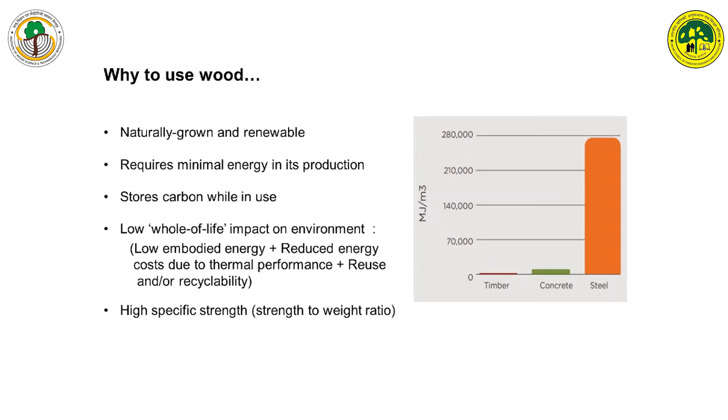Then if wood is good in properties as compared to metals, can we use any wood for every application? No, because to qualify to be used as a structural material, or even for non-structural applications with low load bearing, we need certain mechanical properties, which Dr. Shukla has mentioned already. These are the mechanical properties we measure in the wood, and based on the mechanical properties we suggest the end applications.

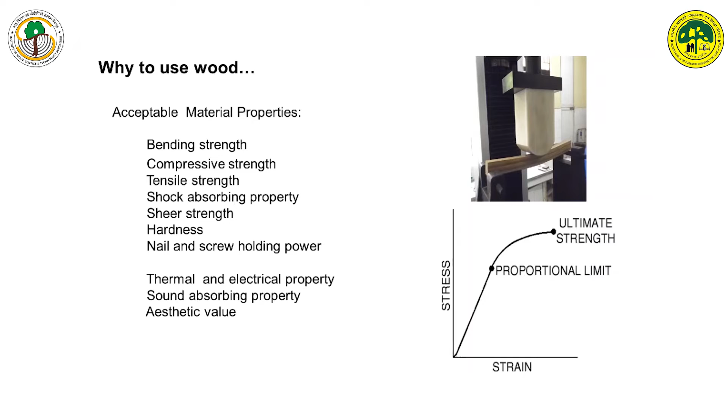However, there is huge variability in wood, and in spite of that variability, it is possible to derive acceptable limits for all the mechanical properties. If the mechanical properties are not acceptable, it will be difficult for the designers, particularly the engineers, to design a structure. So although there is a lot of variability in wood, it is still possible to derive acceptable values for all the mechanical properties.

So as I mentioned, if every wood has mechanical properties, can we use every wood for any application? No, it's not possible, because there are differences. A specific application needs certain mechanical properties, as highlighted by the previous speaker. So we have to prioritize the properties, and based on the properties, we have to select the species. This entire process we call measuring the suitability indices of a species, and arbitrarily we cannot suggest any species for any end application.

We have to have some certain scientific background when we use the timber or allocate a timber for specific use, and that is done in a systematic manner by compiling the physical, mechanical, as well as sometimes the woodworking properties. The purpose of this entire calculation of the suitability figure is to broaden the resource base, so that some of the primary timbers, which are now in short supply because of over-exploitation, can have some relief, so that other alternatives can be utilized in place of primary timbers.

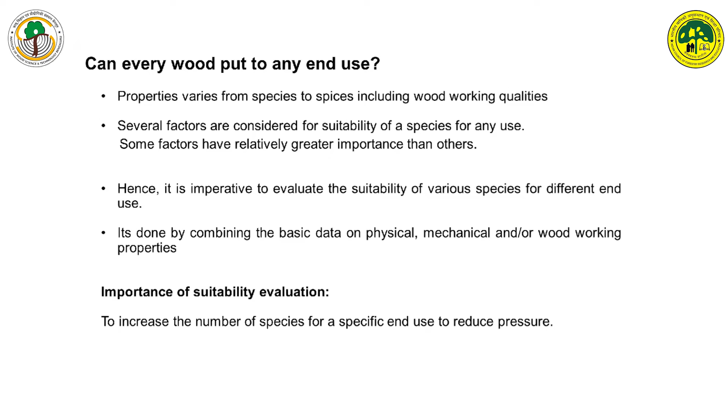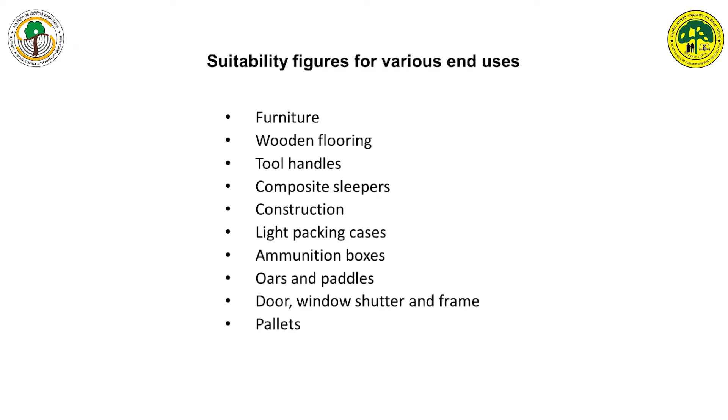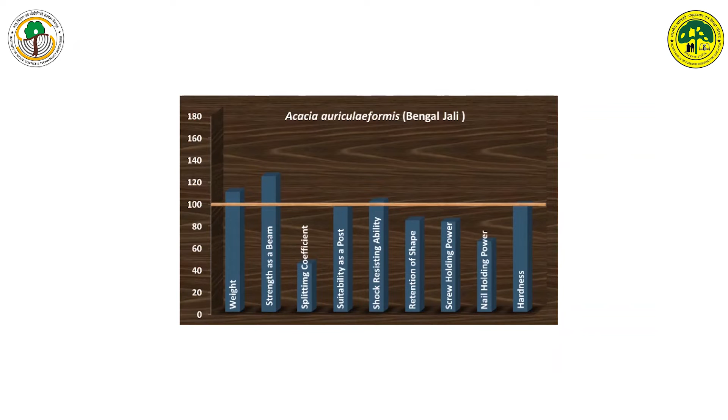So these are the strength parameters that we measure. I don't want to highlight, just to show this. Based on these figures, we calculate the suitability figures for each application. Based on the application, we compare the values of secondary timbers with respect to teak as 100. The horizontal line shows 100, that is the value for teak, and we compare the value with teak and see whether it is performing better than teak or at par with teak.

For example, in case of construction, although sir has already mentioned these values, I just want to highlight the number of species recommended. Although we have almost 150 to 160 species recommended for construction applications in the BIS standard in 1986, unfortunately most of the timbers have been locked up in the natural forest, and we don't have access to those timbers. So if we want to promote some alternatives, we have to compare those timbers and place them in one of the groups if confidence among the consumers has to be brought.

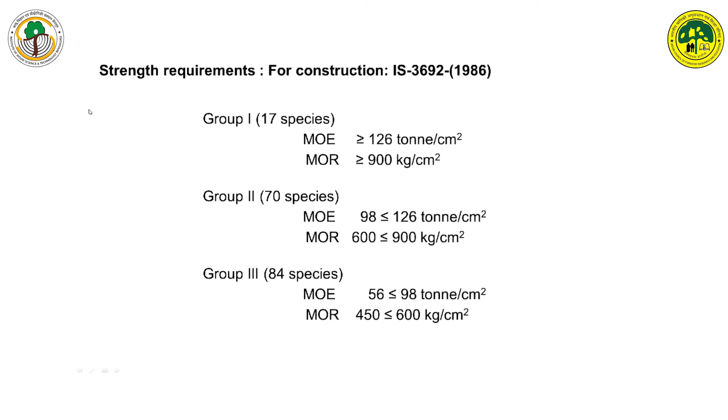So this is just to show how the timbers have been classified and what mechanical properties we need. Similarly, in the case of door and window frames, around 70 to 75 species are recommended. Again, for most of the timbers, we don't have the luxury to avail almost 80% of them from the forest. So we are left with only plantation timbers.

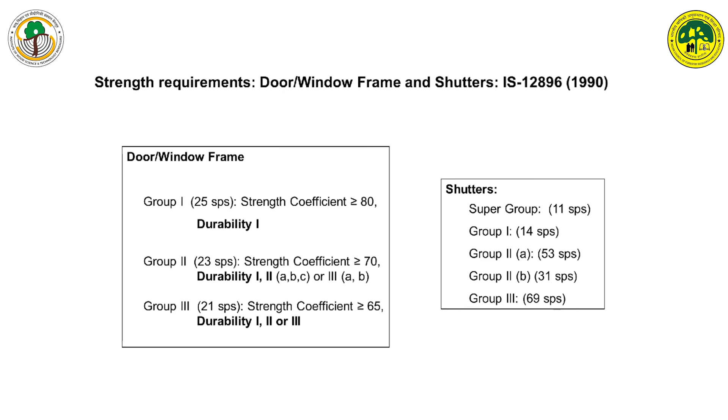Now, I just want to highlight one parameter here. While the mechanical properties, physical properties, and woodworking properties are important to determine the suitability, sometimes durability and other aspects are also important for certain end applications. So only mechanical or physical properties cannot suffice for the suitability of a timber. In certain places we have to see the durability, and treatability is also a problem. These two are also important when you talk about the suitability of any species for any end application. So based on that, as mentioned, IWST has recommended certain species in place of primary timbers. So these are the species recommended for other applications.

Now when you talk about wood processing: to utilize any timber, processing is needed, because wood is a biological material available from a standing tree. But once the tree is felled, whatever moisture is present becomes a culprit for utilization, so proper processing is necessary to make it usable for a longer period. This is a traditional process. Wood processing is not very advanced, except that some advanced machineries are being utilized. Otherwise, the processing steps are almost whatever we have been following for many centuries.

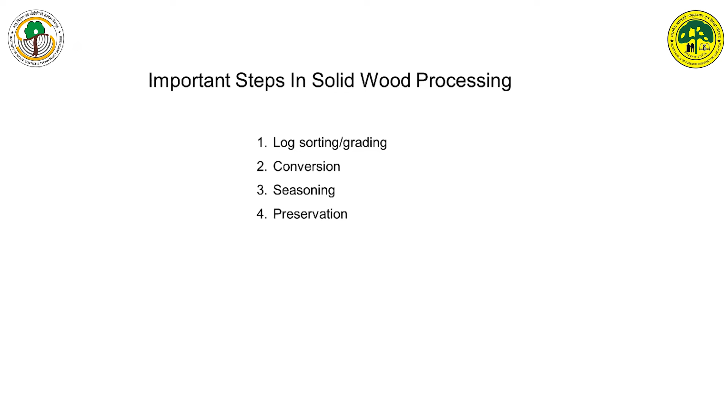So the important steps are log sorting and grading. I'm not highlighting the importance of felling here because systematic felling is not being practiced nowadays; it's very less. Whatever we are getting is mostly of plantation origin. So the first step is log sorting and grading, then conversion, seasoning, and preservation. I'll just highlight the importance of sorting and grading.

Because, as I mentioned, we don't have the luxury of getting bigger dimension trees like what we are getting from natural forest. So now we have ended up with small girth timbers from plantation species. These timbers have their own merits and demerits because the girth is also small. Sometimes a lot of defects are present. So without proper grading, when we go for conversion, the output may be poor.

So grading and sorting is very important as far as the output is concerned, because while productivity in the forest is one way to improve the wood availability, better output from the conversion is also one of the approaches to improve the wood availability to the consumers.

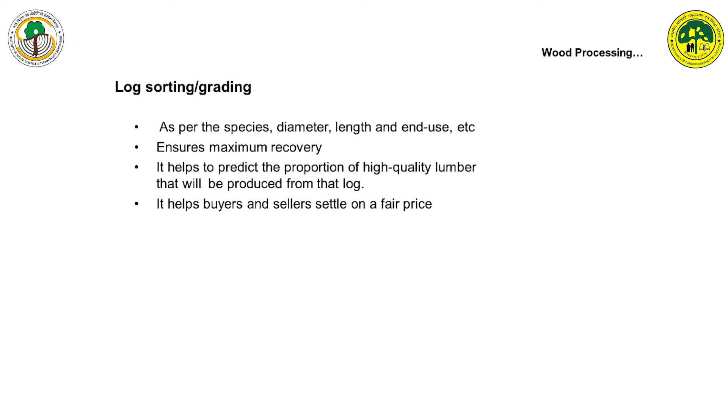Traditionally, log sorting is carried out based on species, diameter, length, and end use. It ensures maximum recovery, it helps to predict the proportion of high quality timber, and ultimately it helps both the buyer as well as the seller to settle at a better price. The seller knows what he is selling, and the buyer knows what he exactly is buying.

Just to give an example, what is the importance of grading? Traditionally, we do visual grading, or to some extent acoustic grading by experienced people, by knocking the log, just to find out the presence of hollows, knots, or decay inside the wood.

But in the last couple of decades, a lot of scientific methods have been utilized in grading logs, mostly X-rays as well as ultrasound. Then it is possible to grade the timber in a more precise way, because visual grading can be very subjective and depends on the experience of the person. However, if you go for mechanized grading, that variability can be minimized, so that the output can be improved.

So with proper grading, we can improve the conversion output, which can also serve as a way of saving a lot of wood. It is equivalent to producing more wood. Although we are not producing more wood, we are actually producing more wood from the available logs.

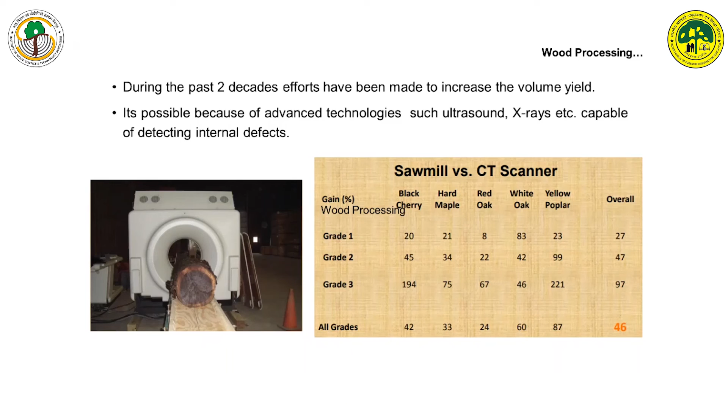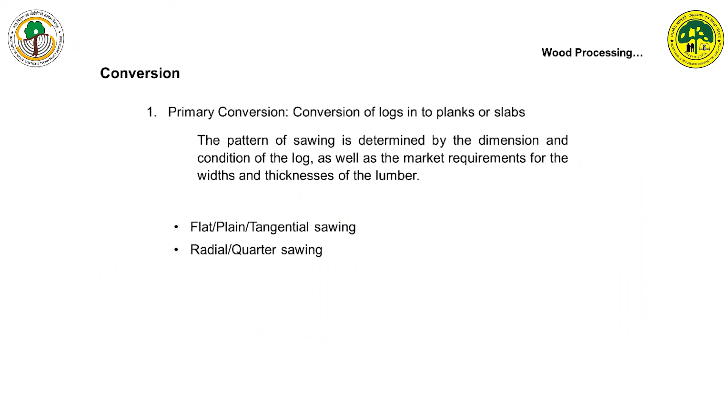And in conversion, we have still been following the traditional conversion practices. Basically there are two types of conversion. In the first conversion, log breakdown happens to slabs, mostly done by band saws, and this primary conversion can be done either by flat sawing or by radial sawing. The sawing itself determines the quality of the material. If we go for flat sawing, we can get maximum recovery. The recovery can be around 70 to 80% of the total log.

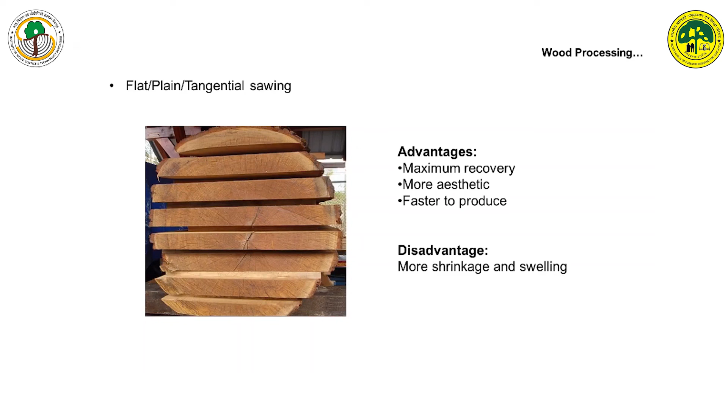The aesthetic value of the tangential plank cuts is really good, and it is easy to cut in the sawmills. However, most of the planks we get are not very dimensionally stable because of shrinkage and swelling. So in order to minimize this, other methods have been suggested, like balanced tangential sawing or even radial sawing. In radial sawing, the disadvantage is that it's very time consuming and labor intensive. However, the advantage is that it's very dimensionally stable.

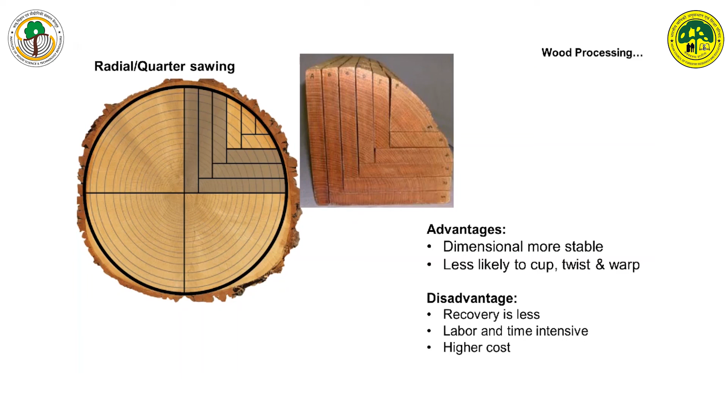However, when we talk about plantation timbers, it is very difficult to follow this sawing if the log has a small girth, because first the log is converted into quarters, and once we cut into quarters, the available plank size will be very small. So this is only feasible when the logs are of considerable diameter. And it is expensive as compared to tangential sawing, because it needs a lot of time and manpower. However, when high value products are needed, it can fetch a premium price, but not in case of normal usage like furniture.